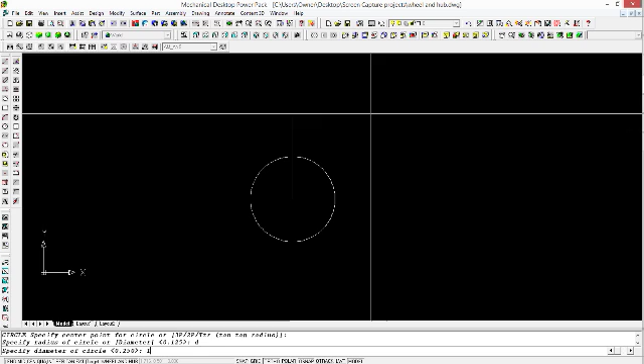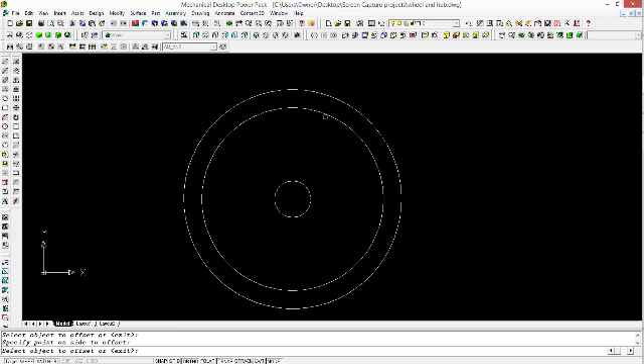And every circle needs a hub, needs a hole in the middle. So in this case, the diameter of that is going to be 0.25. Right now it's just basically a CD or a DVD disc. But it wouldn't make a very good wheel. It needs a hub and it needs a tire, or some kind of width to the rim. So we're going to give it a little offset of 1.25 inches, 0.125 inches is good. And now we have something that actually resembles a wheel.

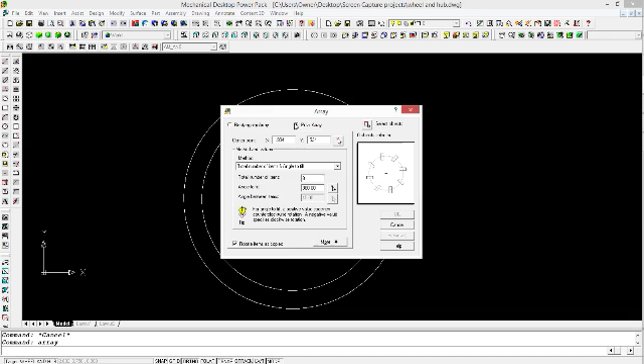Now, if we wanted to, we can get complicated. We can copy this little hole in the middle and move it up here, about there, give it an array, polar array, selecting my objects. The center of the array is going to be right about there, and 8 of them looks good. Okay, and there we go.

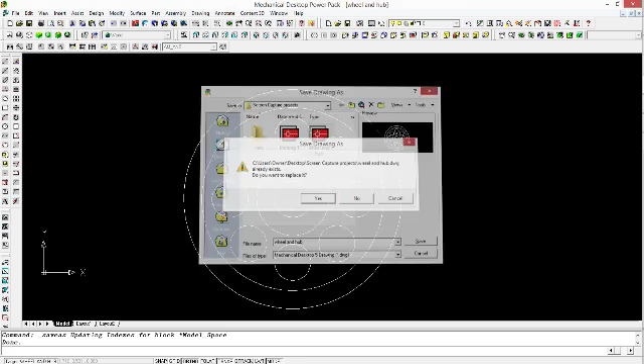Now we've got a real wheel, you might say, but it's still only 2D. We've got to convert it. Let's go. You have to save the drawing, of course, everyone knows that. And I'm going to do save as, my little wheel and hub experiment here. And yes, I want to replace it. Now it's saved, it's locked in.

We can get rid of or minimize AutoCAD. And let's draw in Cubify Design. Let's open that AutoCAD drawing, wheel and hub. There it is, and open it. And yes, okay, looks good.

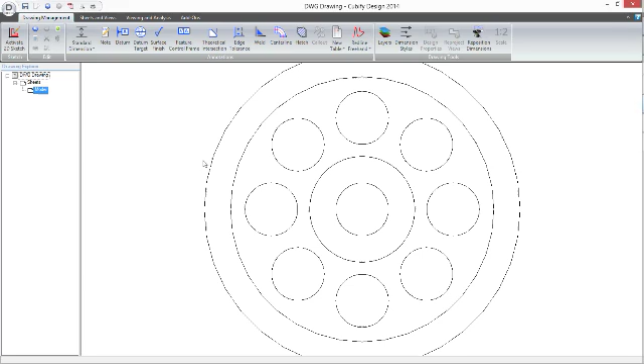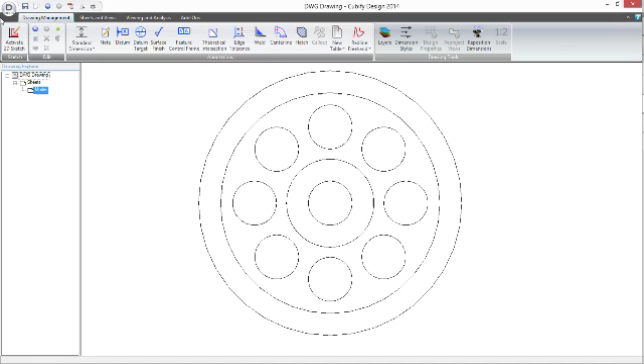And there it is. Now, in Cubify Design, this is Cubify Design 2014, and in this particular drawing, it gives you a place here where you can do all sorts of little odd things. Unfortunately for me, none of these things really have any use. And since I use AutoCAD anyway, I don't need them. So I can go directly to activating sketch, and there it is.

Now I'm in the sketch, and you can see I can manipulate all of these parts of the drawing. These are real lines, polylines. Every object that you put into Cubify Design has to be a closed polyline, or some kind of a closed object. You can actually have 4 separate lines forming a square as long as they all touch the corners. Everything has to be closed.

Otherwise, it does not work, and that can be the slightest one millionth of an inch opening, and it will not function. So you have to have all these lines closed. Now we've got everything here. You'll notice this bounding box, this little red bounding box, and it doesn't really do anything. It just shows you the limits of your sketch.

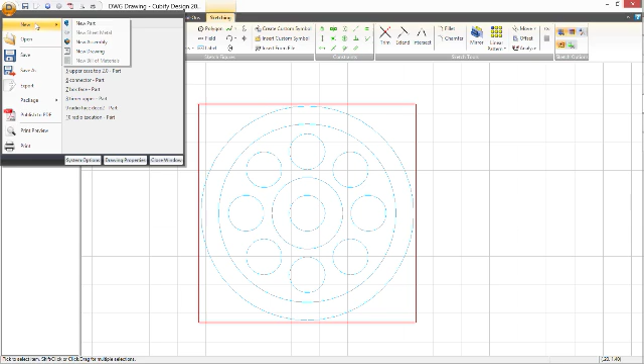You can't touch it, it's just there for illustration purposes only. And I go in here and I select everything, all the drawing. I hit Control-C, and that has copied the wheel onto the clipboard. And now we call up here, we'll do it here, a new part. And this is where you draw the part itself.

The Cubify Design software starts you in modeling space for some reason. Modeling space is great if you have a model, but since you're creating one, you have to go to a sketch.

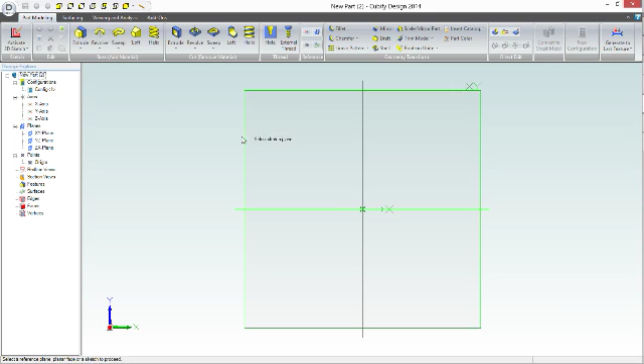You activate the sketch by clicking onto this little rectangle here, and you'll see you have to hit sketch. You got a grid, and if you've got a grid, you can now plant your sketch.

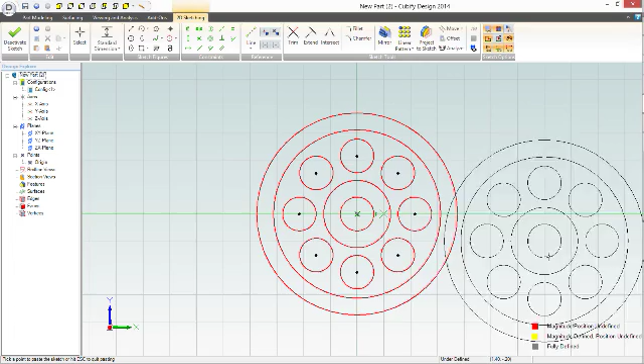Control-V is how we're going to do that. Notice your sketch is still floating around by your cursor, ready to paste again, anywhere. Escape gets rid of it, but it's still on the clipboard. If I hit Control-V again, it comes right back, ready to paste again. So there it goes, it's gone.

Now we have just one sketch right in the center, because we clicked on this little snap controller here. If I turn that off, it'll plant the drawing anywhere I click. But leaving it on lets me get right back to that center spot each time.

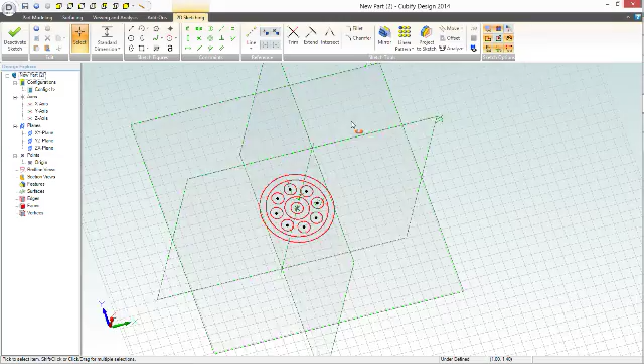Remember I was telling you about this plane, this rectangle out here? Look at this, there's three of them — X, Y, and Z. In this particular case, we're working with the XY plane, which is the one I happen to like.

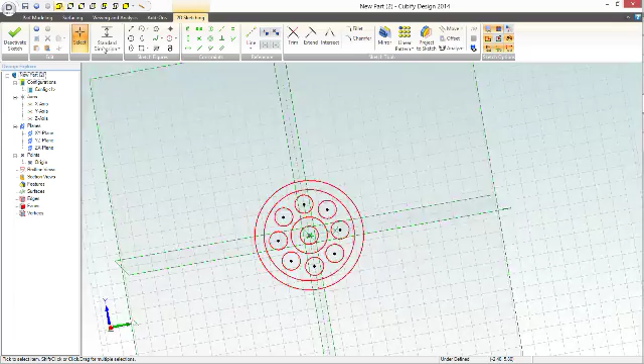You've got all these little boxes up here that tell you where the XY plane is. I'm just rolling my mouse wheel to zoom in and out, and notice the zoom follows my cursor. So I've got the sketch right here.

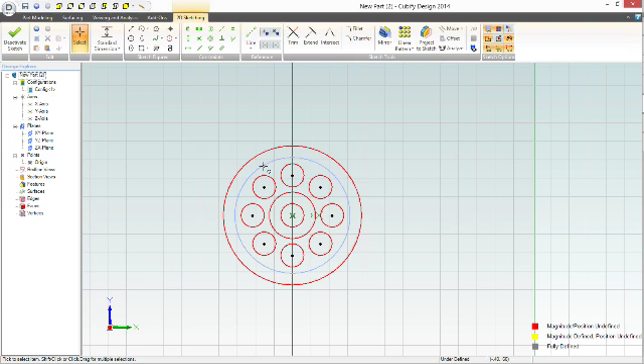Now I could extrude this, but it wouldn't be very effective. What we want to do is take this one step at a time and actually extrude the plane, the web, the big part behind that's holding everything together.

There's our rim, we don't need that — I click on it and hit delete. And here's our hub, I get rid of the hub. Now you can see I've got this flat disc with holes in it, and I can now extrude that to get a disc with holes in it.

But I have to go to part modeling now to do that. Part modeling is very interesting — this is where a lot of action takes place.

You can extrude solids, see, Boss, to add material. This is all real material right here. Each one of these has its own secret little way of working, but they're all very easy to use and very effective — you just have to know their secrets.

Then over here you have the cut. This is negative material — holes and negative stuff that you take away. So these two windows have very similar properties, except one is real material, one is nothing but air, just holes. Here's your threading.

You can actually make screw holes and external threads — you can make screws, threaded holes, and so forth. But here's some stuff you really work with quite a bit.

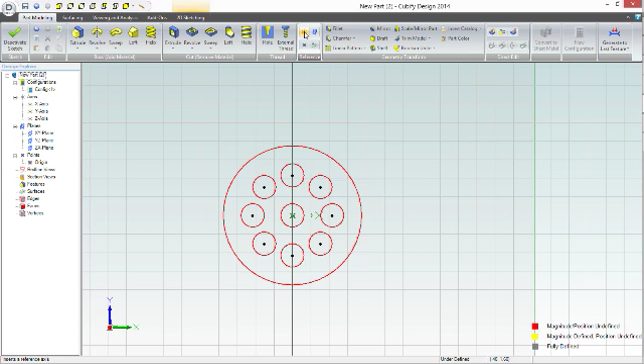The first thing you really have to think about, and use a lot, is your plane window. This is identifying — it's got a little icon there, a reference plane, insert reference plane. You can create new planes with that. Remember, since you're working only on one plane at a time, you have to create new planes all the time. It keeps your drawing organized too — it's a very neat tool.

The fillet, self-explanatory really — fillet and chamfer, they will create the fillets for you. Linear pattern — this is like the array tool in AutoCAD.

Mirror — I don't use it very much, but you can create some pretty interesting design features with mirror. Draft more or less pulls your drawing out of the plane. Scale obviously does the same thing, trim does the same thing. And Boolean Unite, that's a whole other complicated tool we'll go into in another lesson.

And ignore these — insert catalog, part color, and all that. That's if you're doing some kind of illustration work.

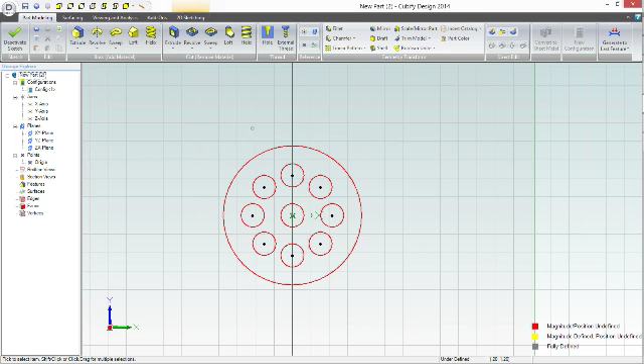So here you are — basically you've got your sketch, you want to draw it out, you want to create something. So you hit extrude, and it automatically goes to 5 inches. You'll notice you've got an arrow telling you which direction out of the plane. There's our plane that we're working in, where our sketch is laid up, and it's going to draw that right out of that plane, giving you 5 inches.

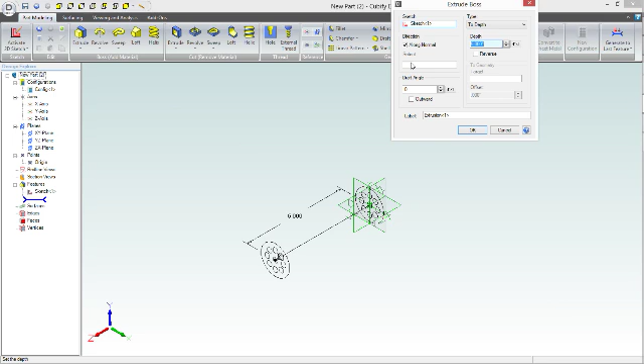Well, we can change that. We can just go up here where the dark blue is, and I'm going to draw it out 0.06, six hundredths of an inch. There it is.

As long as this is dark blue, it's still pretty much like modeling clay, it hasn't set up yet. If you click out here in empty space, there's your part. So you can click on this plane, and we're going to draw out a new plane, out to this surface right here, which was 0.06. Apply, and close.

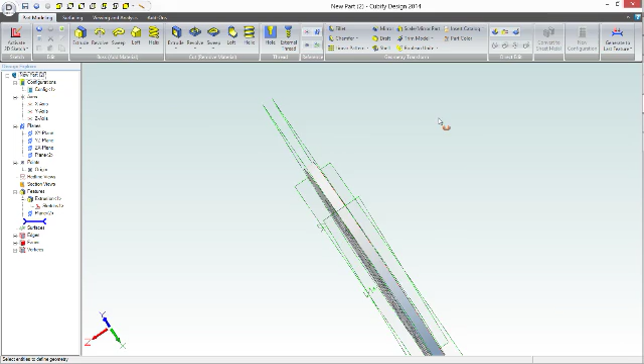Now we've just created a new plane entirely. Don't let that worry you too much, because all we want to do is work on this surface right here. Next we're going to go back here, I'm going to be on that surface plane now, not the one we drew the thing out of, and activate 2D Sketch again. Now we're working right on the surface of that thing.

Let's go back to our drawing. We come over here and pick up our drawing again. We don't need these holes in the middle anymore, so we can hit escape, and everything deactivates. Now all we want is our tire rim, and holding shift, we can click on 2 objects, Control C, and go back to our part. Control V, paste that part right in there, and since we've got snap going, it puts it precisely right in there. You see it's still floating around. Hit escape, there it's gone.

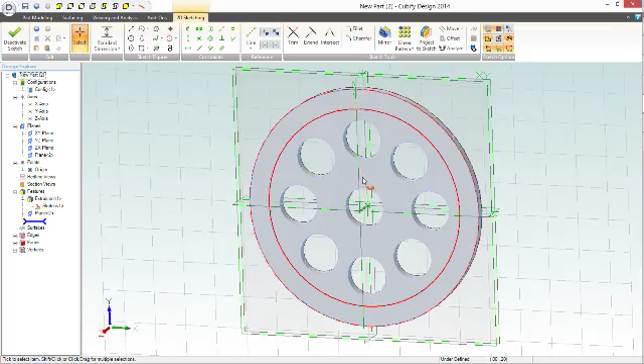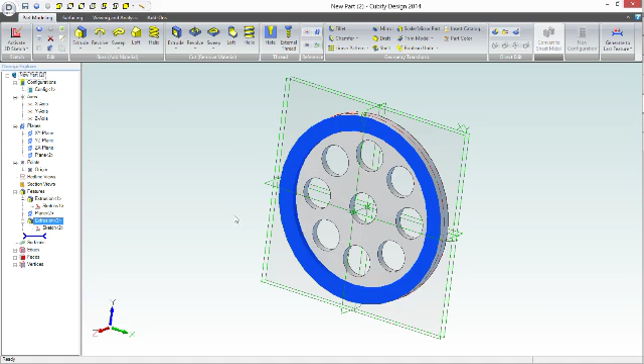Now we're working, as you can see, right on this new surface that we created, and we're going to extrude that out into a rim, a tire rim. So go back to part modeling, extrude, and let's draw that out, not very far, 0.05. It'll just give us a reinforced edge for hitting rocks and stuff. And now it's still pliable if we want to play with it. Click out here in empty space, and there's our rim.

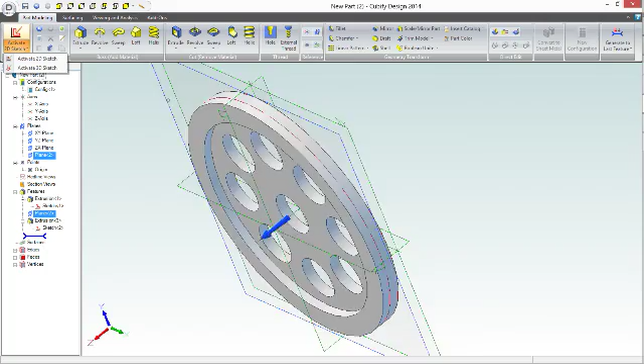Now we're still working on this surface, right? We want to draw the hub out some, so let's go back on that surface and hit activate 2D Sketch. You have to have a plane selected in order to go back to sketch, because you're telling the program what plane you're going to be drawing on. Once you tell it, the program will go right back to sketch. Now let's go back to our drawing. We need to pick up the hub. Oops, I clicked on the part. There we go, here's our drawing.

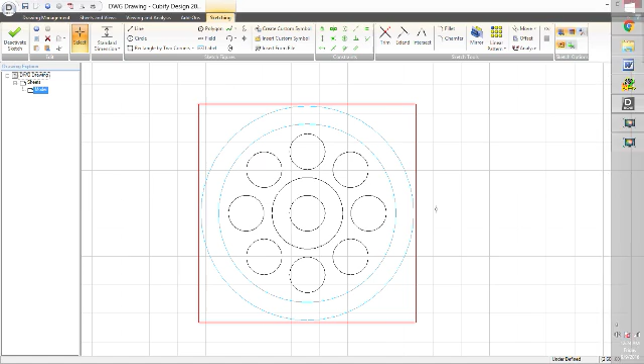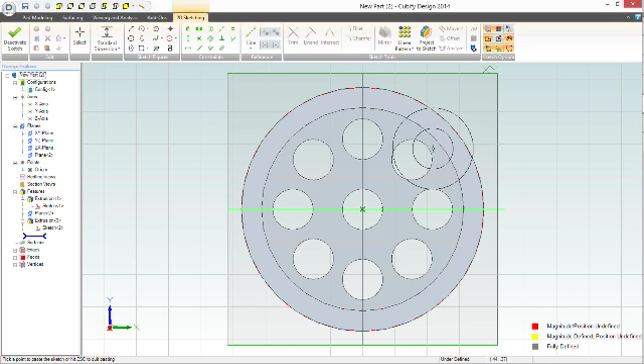Now here's our hub, and I hit shift again so I can get more than one item. It's a little sensitive, you have to be right on it. Control C. Now we've erased that rim we had on the clipboard, and picked up the hub. We're going to go back to our part, and hit Control V. There's our hub, and again it snaps right into the center. And again, we're right on the surface, as you can see.

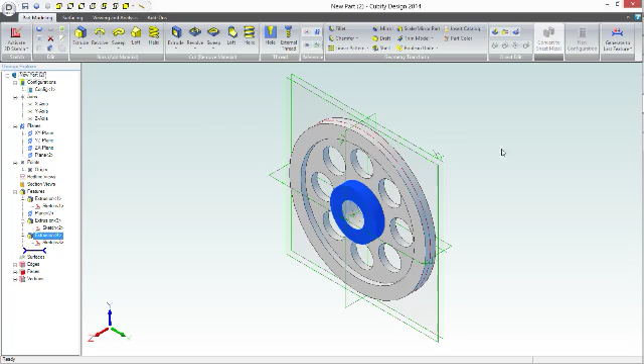So let's go up here to part modeling. We're going to extrude that, but much higher this time, let's go 0.1 inches off of that web. And now we have our hub, we've got our tire, we've got our web, we've got our lightening holes, and we've got basically a pretty good part.

There's a good wheel. Now, any engineer will tell you, if you've got just a sharp 90-degree angle in any part, you have a place where force can concentrate, and that can be a weakness. It probably wouldn't matter much on a small part like this, but just to demonstrate, I'm going to show you how to put in a fillet.

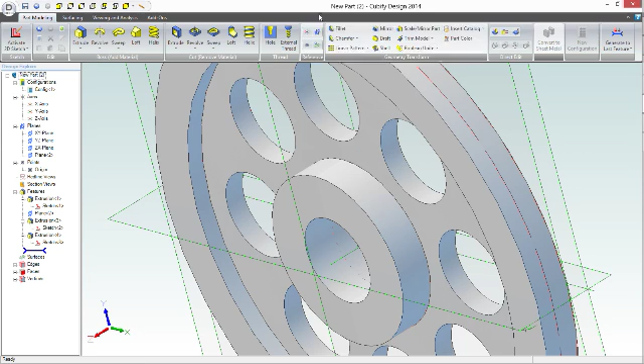We know that this bright blue part here is 0.1 inches, 1/10 of an inch high off of this plane right here. So we're going to go in here and pick a fillet, and we want that little edge right there to be our fillet. Once again, you get a little data window up here, and they always start at 1/2 inch. Obviously, that's not going to work. You can see this little representation of how big that fillet would be. It's bigger than our part.

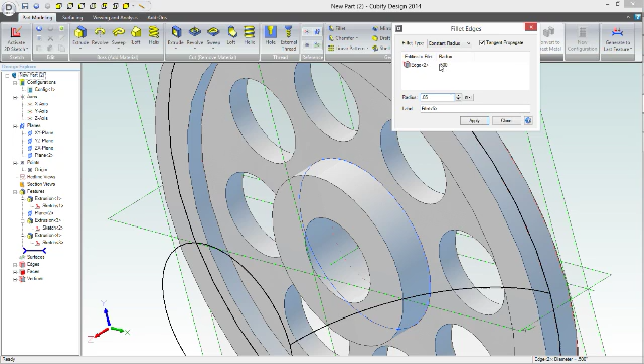So we don't want a 1/2 inch, we want something like 0.05. We hit apply, and you can see this fillet instantly forms. Let's close that. Fillet instantly forms right there in that spot, and that gives us a tremendous amount more strength, keeping the hub from falling off the wheel.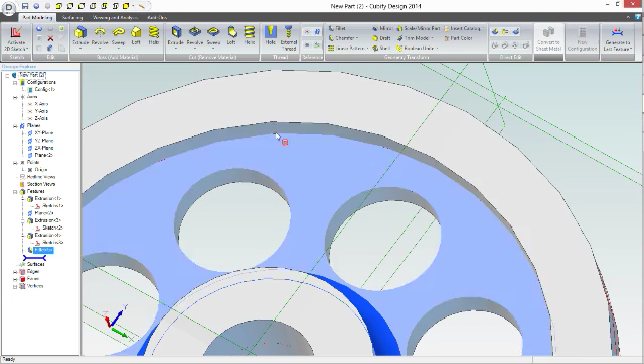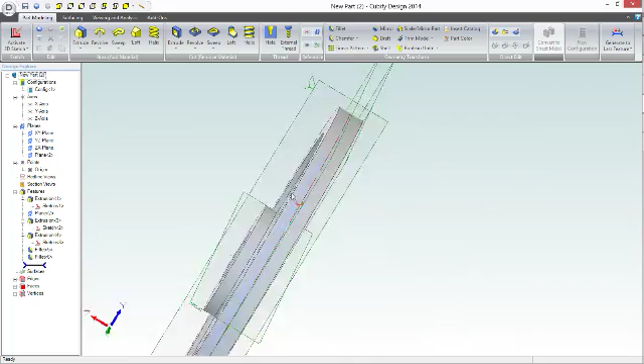We can do the same thing in here. Remember, this was 0.05. We can click right on that, go back to fillet, and let's say instead of 0.05, let's go with 0.03. Apply, and there's the fillet inside the hub, the rim rather. There's our fillet. Click in the empty space, and it's now sitting concrete. There it is, there's our wheel and our hub.

Now, this doesn't do us much good. It's just a 3D representation of the part. It doesn't help us much. If we can't pick it up, we can't hold it, we can't assemble it. There's nothing we can do with it until we create it in the 3D printer.

So let's export. Now, we can save the drawing if we want, save it as we want to come back and work on it and do some other stuff to it, and bring it back one day and save as usual. But what we want to do is export a real part, an STL file. This is where we're going to convert our drawing to an STL file, something that a 3D printer can actually use.

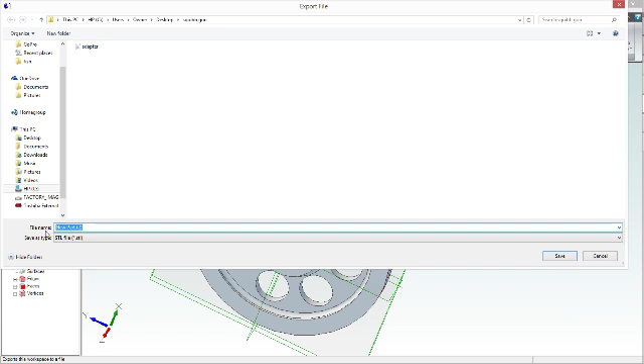And so we're going to call this just a wheel, and we're going to just save it. It's that simple, and it gives you little dialogues. This stuff works fine for me. And as soon as you get this black box and you see the STL file loads, it's saved as an STL file. Now we don't need this anymore.

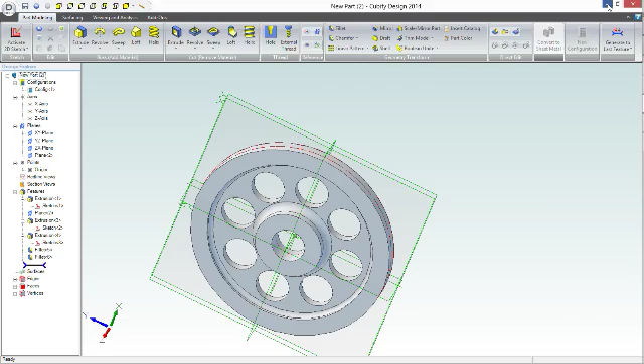We just minimize everything out, and we're going to go through our Simplify 3D program. I'm going to open Simplify, and we're going to show you how to convert this to a 3D printed part. And there's Simplify. Opens instantly. It's a very, very good little program.

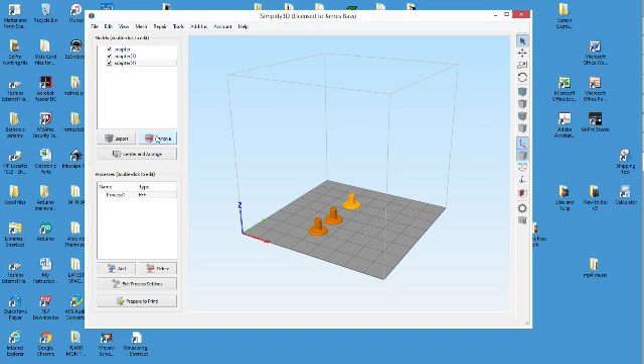It opens with your 3D representation of your printer table. This happens to be approximately the size of my printer table. And I've got 3 little grommets that I made earlier, and I'm just going to remove those guys. And we're going to import. What are we going to import? We're going to import wheel. And yes, there's our little wheel.

Left click, roll it around, take a look at it. It looks pretty good. But there's that orange, yellow, highway paint model of our wheel that we just created. Now this wheel was just a few minutes ago, just created out of absolutely nothing.

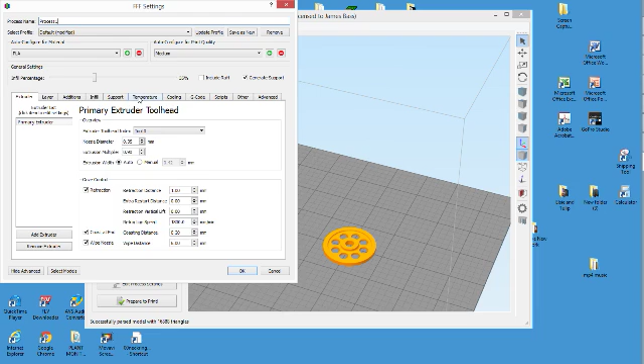And I can go in here to edit process, and this is where you really get kind of complicated. You got to study this one a little bit more, and I won't go into it for you, but this is where you set up all the parameters for your specific 3D printer. What makes your 3D printer tick, what kind of material are you using, what temperatures you're using, and lots of stuff to do with 3D printing. That's a whole other class.

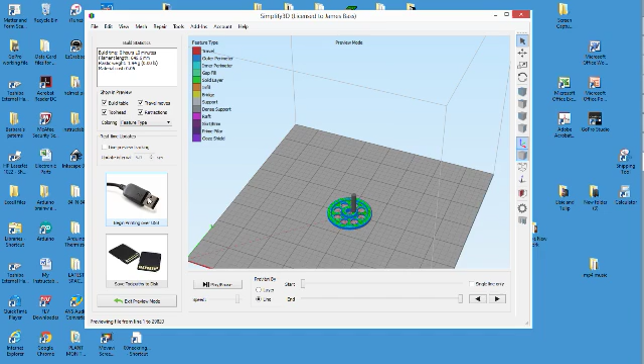And we accept all those parameters, and we go prepare to print, and it gets ready to print it. Then, in my case, I've just turned on my 3D printer. I can go ahead and start printing and it says begin printing over the USB. My part disappeared because now it's going to recreate the part as it prints it.

But what I want to do is go up here to Tools, Machine Control Panel, and I'm watching the G-code actually load and start. And here comes the temperature graph as my bed is starting to heat up. Here's the temperature line for my extruder head and all that. It would take us 10 minutes to print that wheel.

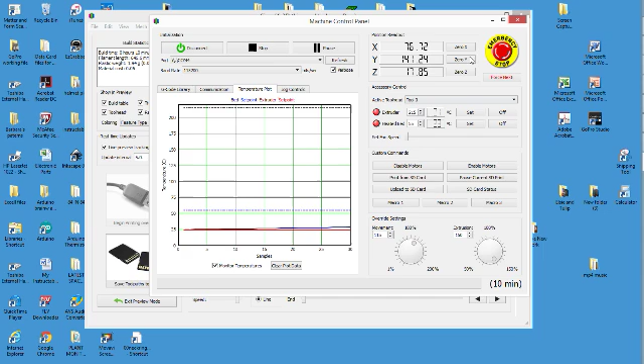And I won't print it right now because I don't have any use for it. But this is how it would all begin. When this is through, I'm not going to have to touch anything else. The 3D printer is going to print that part if I let it continue, which I'm not. Emergency stop, turning everything off. We can go back to the model view, and there's our wheel.

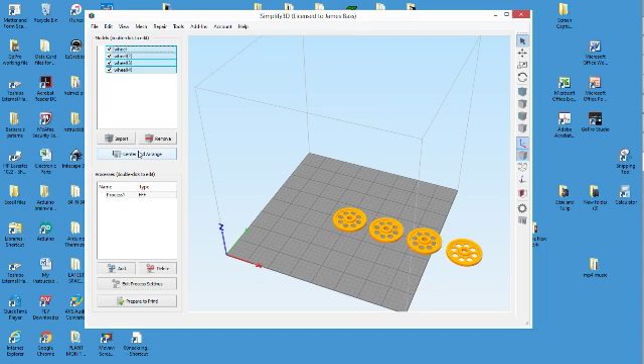I can create more of them if I want. I can go up here and go edit, duplicate models, and I want 3 of them. Okay, copy them. It gives me 3 new ones. I hit center and arrange, and it automatically centers them, puts them flat on the table. There they are. It would print 4 wheels, and we could make a robot if we wanted to.

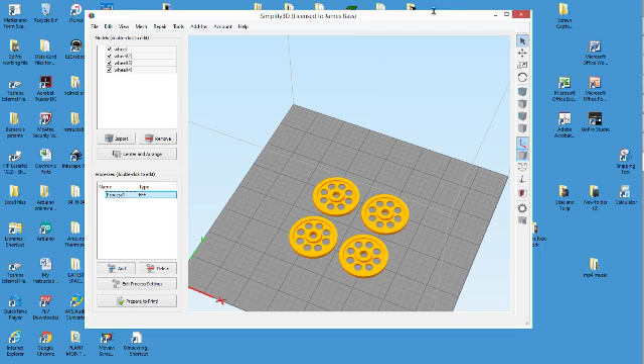Or a rock crusher. I like the rock crusher idea. But there it is, that's how it's done. And if I let this proceed, it would print me 4 little 1.5-inch diameter wheels, just like that. And that's about it for this particular lesson. I'll do some more later.